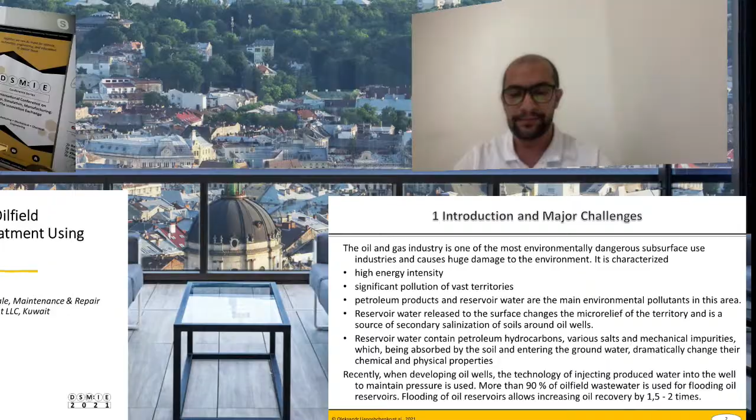Recently, when developing oil wells, the technology of injecting produced water into the well to maintain pressure is used. More than 90% of oil field wastewater is used for flooding oil reservoirs. Flooding of oil reservoirs allows increasing oil recovery by 1.5 to 2 times.

Next slide. The current scheme of pumping wastewater back into the reservoir at oil fields, with the addition of reagents to increase oil recovery, leads to a significant change in the chemical composition of reservoir waters, which affects the state of the subsurface and also creates a threat of spreading pollution to other aquifers.

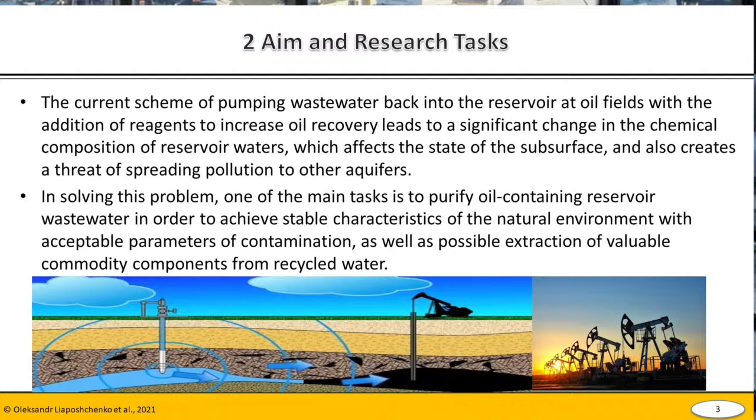In solving this problem, one of the main tasks is to purify oil-containing reservoir wastewater in order to achieve stable characteristics of the natural environment with acceptable parameters of contamination, as well as possible extraction of valuable components from recycled water. Next slide.

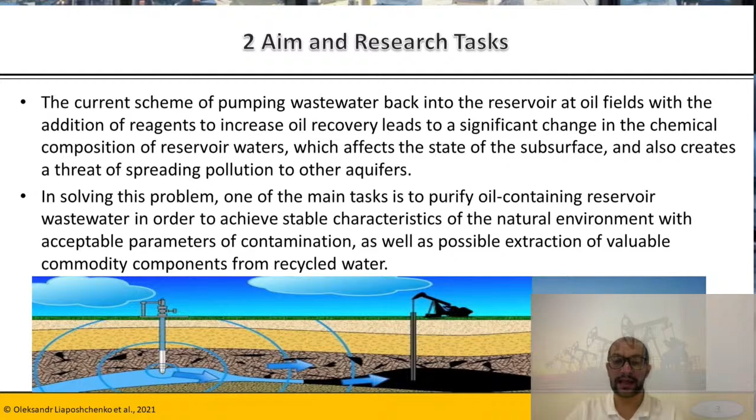Oil field wastewater purification is carried out by mechanical and hydromechanical processes: mixing, settling, centrifugation, and filtration, in order to destroy the armor shells on oil droplets, achieve coalescence of oil droplets, and remove the partially concentrated oil phase and sediment.

For the treatment of reservoir wastewater in the oil industry, the method of settling in settling tanks is used, but this method often does not provide the necessary degree of cleaning. Therefore, tanks with agitators, settling tanks, separators, centrifuges, hydrocyclones, drop forming units, flotators, and filters are also used as equipment.

In order to successfully purify oilfield wastewater and quickly reduce the aggregative and kinetic stability of oil droplets, oilfield wastewater purification units and devices are developed that increase the effect, depth, and speed of the purification process. Due to this, oil droplets rapidly enlarge through the coalescence process, and a polydisperse system turns into a monodisperse one.

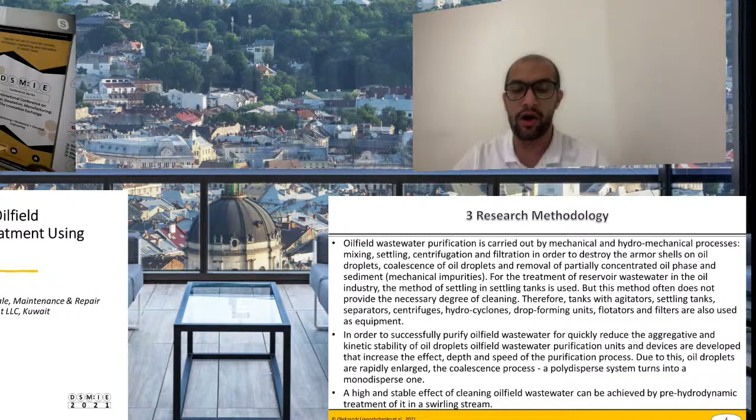A high and stable effect of cleaning oilfield wastewater can be achieved by pre-hydrodynamic treatment of it in a swirling stream. Next slide.

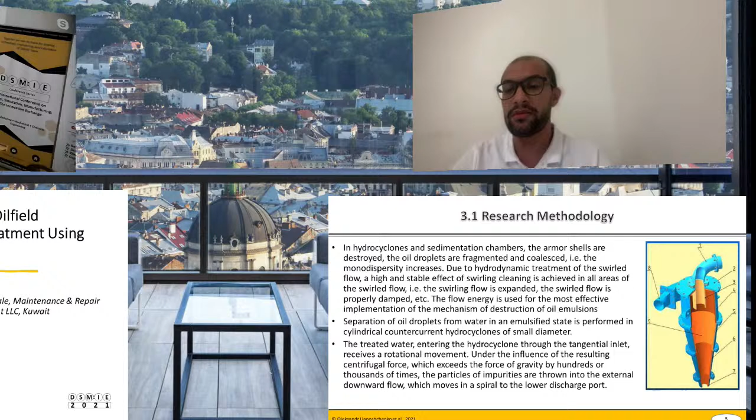In hydrocyclone and sedimentation chambers, the armor shells are destroyed, the oil droplets are fragmented and coalesced, and the monodispersity increases. Due to hydrodynamic treatment of the swirling flow, a high and stable cleaning effect is achieved in all areas of the swirled flow.

The swirling flow is expanded, the swirled flow is properly damped, and the flow energy is used for the most effective implementation of the mechanism of destruction of oil emulsion.

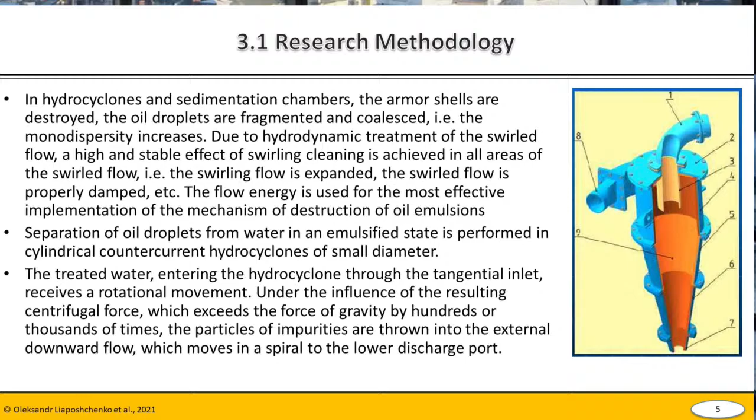The separation of oil droplets from water in an emulsified state is performed in cylindrical counter-current hydrocyclones of small diameter. The treated water entering the hydrocyclone through the tangential inlet receives a rotational movement under the influence of the resulting centrifugal force, which exceeds the force of gravity by hundreds or thousands of times. The particles of impurities are thrown into the external downward flow, which moves in a spiral to the lower discharge port.

The use of hydrocyclones as a stage of wastewater treatment can significantly increase the compactness of the entire treatment scheme and facilitate its operation. For water purification from oil and suspended substance, depending on the required degree of purification, the following devices are used: first, at the first stage of cleaning, hydrocyclones and settling tanks; second, in the second stage, hydrophilic and hydrophobic filters; third, for better water purification, coalescing filters.

The separation mechanism of three-phase systems in hydrocyclones is as follows: solid particles under the action of centrifugal force move to the wall of the hydrocyclone and along a helical trajectory move down to the lower outlet, through which they are removed from the hydrocyclone.

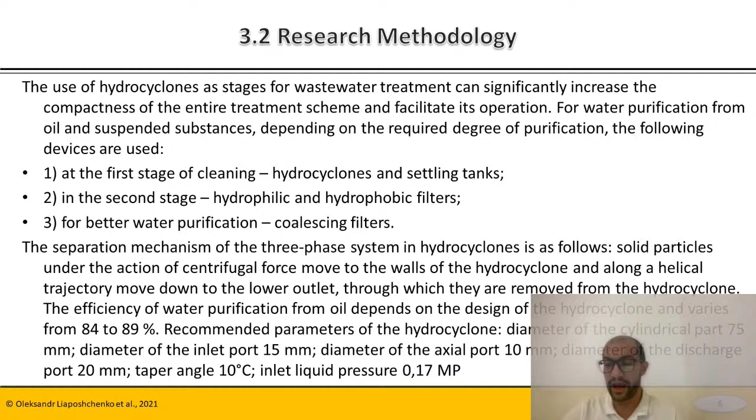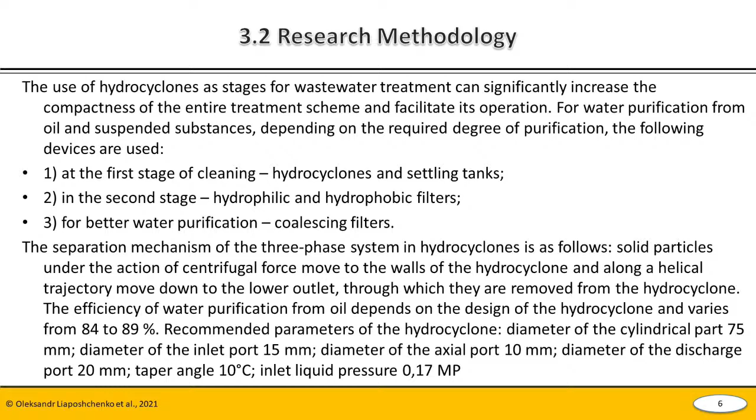The efficiency of water purification from oil depends on the design of the hydrocyclone and varies from 84 to 89%. Recommended parameters of the hydrocyclone: diameter of cylindrical part 75 mm, diameter of inlet port 15 mm, diameter of the axial port 10 mm, diameter of the discharge port 20 mm, taper angle 10 degrees, inlet liquid pressure 0.17 megapascal.

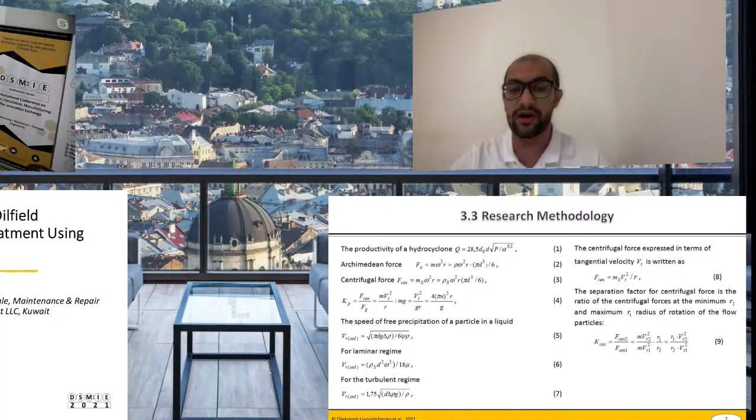The research methodology: this article shows some technology parameters and values for calculation of cyclone installation. As we can see, the multi-hydrocyclone can be used as the main element in the wastewater treatment system, provided the regime is observed in which there is no overexpression of the remaining oil in the water or water in oil.

The acceleration of movement does not exceed the value of 1,000 g. The device implements a mechanism for separating light oil and gas from the heavier fraction of water and oil.

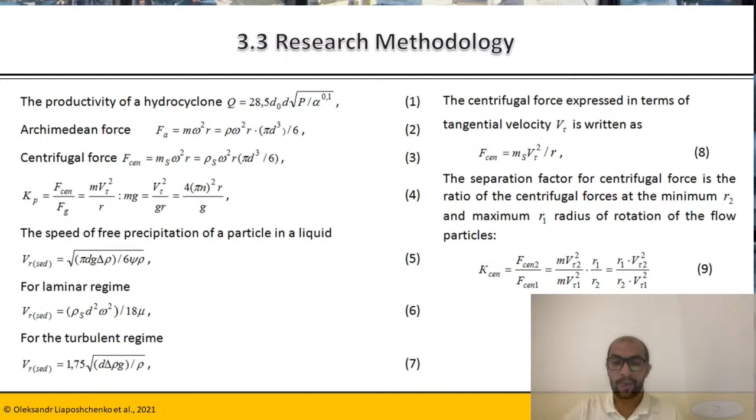Multi-hydrocyclones make it possible to achieve a deep degree of purification, and their use is promising both in the system of oilfield wastewater treatment and in the system of primary water discharge.

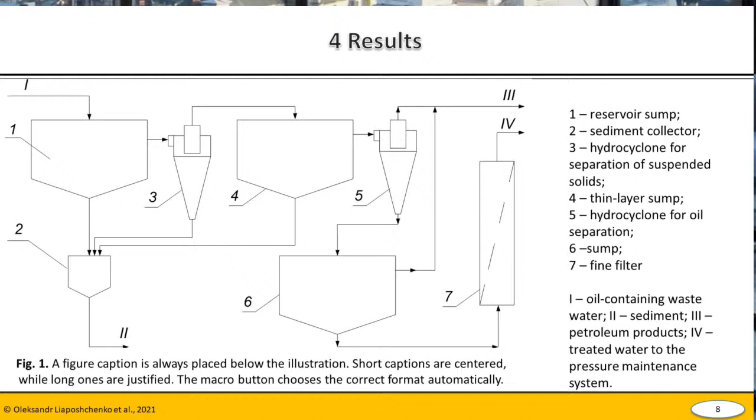It's advisable to treat oil-containing wastewater for reuse according to this scheme. The oil-containing wastewater flows into a receiving tank, sometimes into a pre-sump. Then the wastewater is sent for treatment by pumps, in particular the pressure hydrocyclone, in which large mechanical impurities are separated and dumped into a hopper. After passing through cylindrical conical hydrocyclones and thin layer settling tanks, wastewater enters cylindrical hydrocyclones for purification from petroleum products.

After hydrocyclones, the purified water is sent to flotator, coalescing, or sorption filters. If necessary, final purification of water in the sorption filter to a content of petroleum products of 0.05 milligram per liter is possible.

The treated water is returned to the well to maintain reservoir pressure. The cleaner the water being pumped into the formation, the greater the intake capacity of the injection well, and the lower the required amount of water and the lower the cost associated with the pressure maintenance system.

General requirements for pumped water are limited content of mechanical impurities and iron components, absence of hydrogen sulfide and carbon dioxide to prevent equipment corrosion, no organic impurities like bacteria or algae, and chemical compatibility with reservoir water.

The degree of oil wastewater purification is determined individually for each oil well. The permissible content of mechanical impurity is 3 milligram per cubic decimeter, and petroleum products 5 milligram per cubic decimeter. The presence of mechanical impurities is one of the main factors that cause a decrease in the permeability of the bottom hole formation zone when using both fresh and reservoir waters.

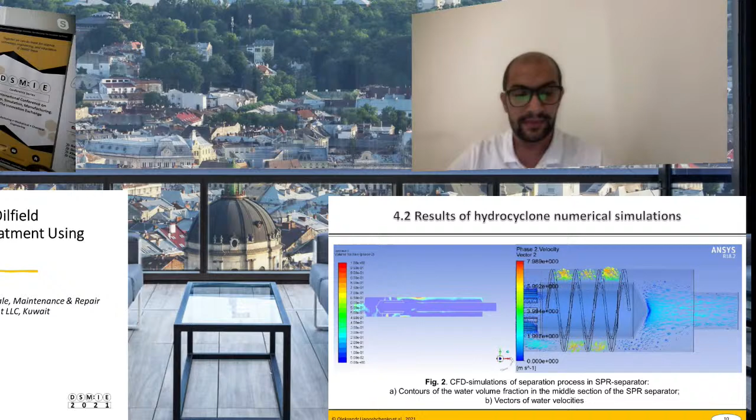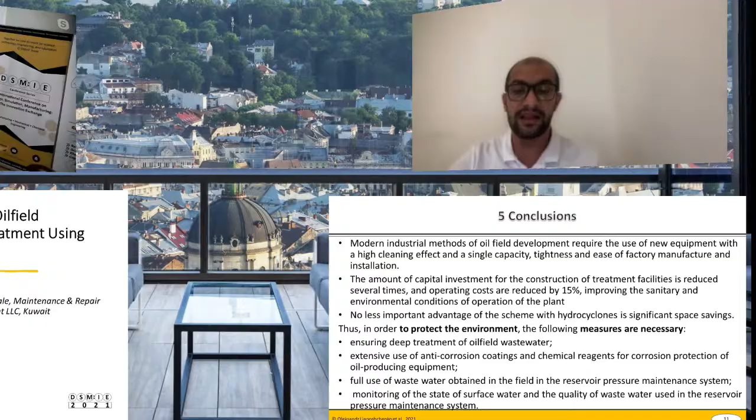Conclusion: modern industrial methods of oil field development require the use of new equipment with a high cleaning effect and a single capacity, tightness, and ease of factory manufacture and installation. The amount of capital investment for the construction of treatment facilities is reduced several times, and operation costs are reduced by 15%, improving the sanitary and environmental condition of operation of the plant. No less important advantage of the scheme with hydrocyclone is significant space savings.

Thus, in order to protect the environment, the following measures are necessary: first, ensuring deep treatment of oil field wastewater; extensive use of anti-corrosion coating and chemical reagents for corrosion protection of oil-producing equipment; and full use of wastewater obtained in the field in the reservoir pressure maintenance system.

Monitoring of the state of surface water and the quality of wastewater used in the reservoir pressure system. The developed methodology was released within the research project and implementation of energy efficiency modular separation device for oil and gas purification equipment. Thanks for your attention.

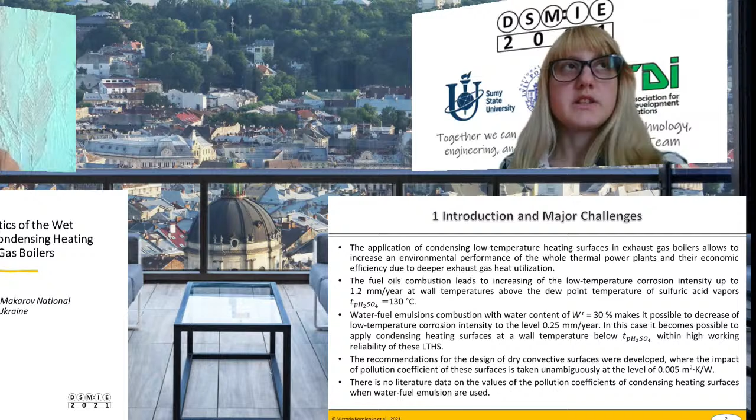The fuel oil combustion leads to an increase of the low temperature corrosion intensity up to 1.2 millimeter per year at wall temperature above the dew point temperature of sulfuric acid vapor, 130 degrees. Water fuel emulsion combustion with water content 30% makes it possible to reduce the low temperature corrosion intensity to the level of 0.25 millimeter per year.

In this case, it becomes possible to apply condensing heating surfaces in exhaust gas boiler with high working reliability on these surfaces. Recommendations for the design of dry convective surfaces were developed. But there is no literature data on the values of pollution coefficients of condensing heating surfaces when water fuel emulsion is used.

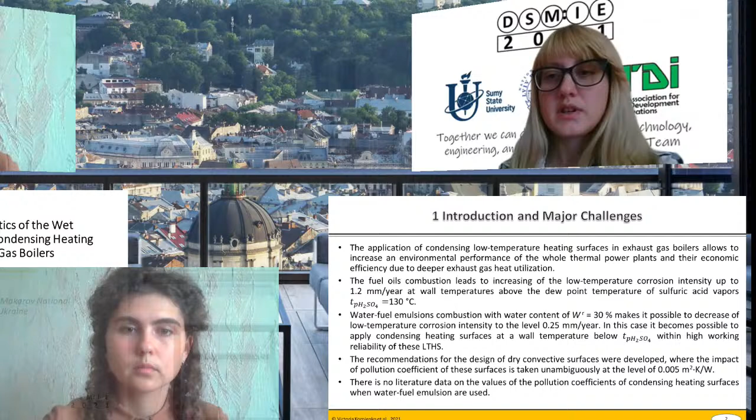Next slide, please. The aim of research is to obtain dependencies of heat transfer and thermal efficiency coefficients from the wall temperature for condensing low temperature heating surfaces.

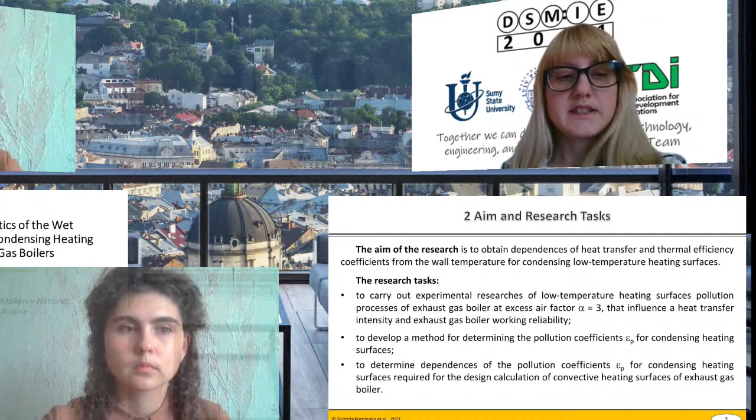The research task: first, to carry out the experimental researches of low temperature heating surfaces pollution process of exhaust gas boiler that influence heat transfer intensity and exhaust gas boiler working reliability. To develop a method for determining the pollution coefficients for condensing heating surfaces, and third, to determine dependencies of the pollution coefficients for condensing heating surfaces required for the design calculation of convective heating surfaces of exhaust gas boilers.

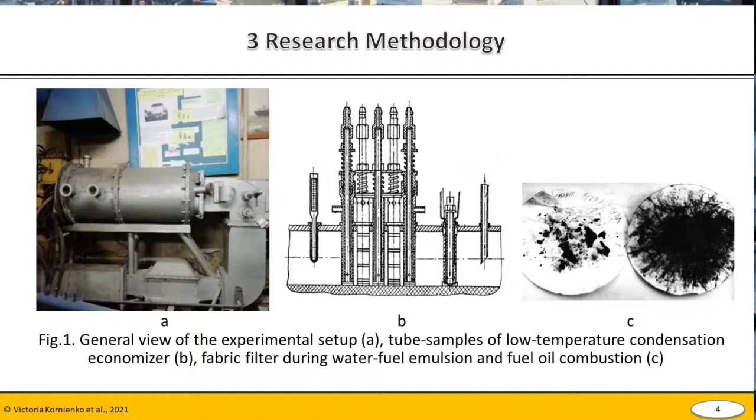Next slide, please. Experimental researches of pollution process intensity at wall temperature below the dew point temperature of sulfuric acid vapor were carried out in an experimental setup with combustion of fuel oil and water fuel emulsion based on them.

The experimental installation includes the following elements: combustion chamber, fuel preparation system, burner, and gas duct. A rotary nozzle is used as a burner.

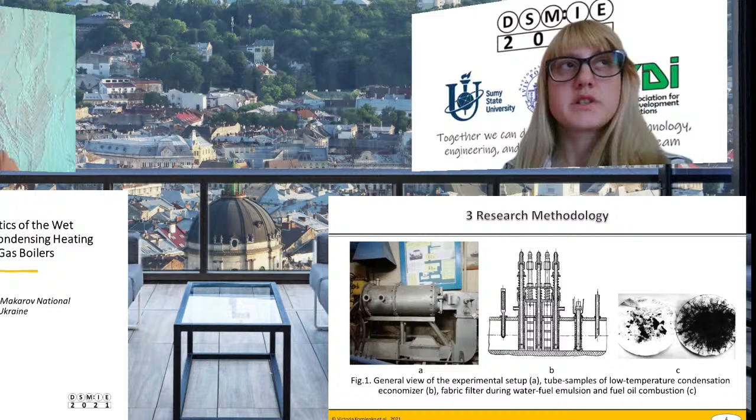Therefore, in order to estimate the pollution intensity when combusting various fuels with different combustion regimes, pollution process kinetics of short-term experiments was studied in order to obtain approximate equations that will enable predicting the development process at any time.

Next slide. The adequacy of obtained results was evaluated by comparing received values of pollution intensities with published operation data and the results of long-term experiments for 100 and 1,000 hours.

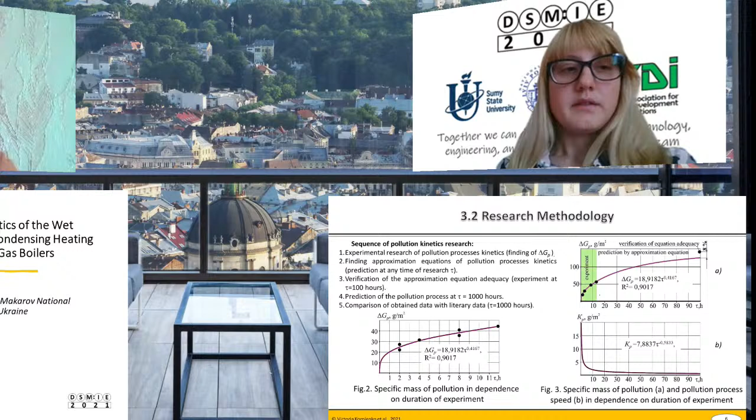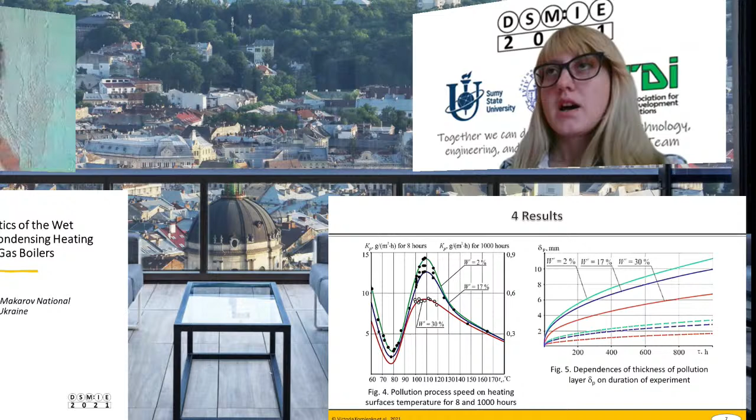Next slide. The thickness of pollution layer and its thermal conductivity depend on the porosity value. According to the adopted methodology, it's assumed that the layer porosity is 0.3 when fuel oil is used, and the average porosity value is 0.48 when water fuel emulsion is used.

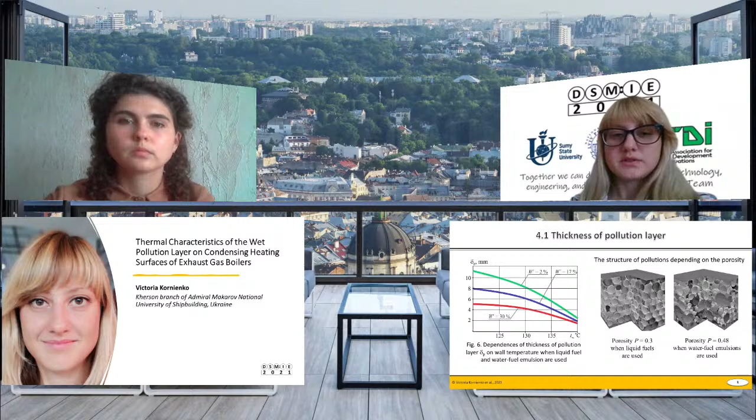Next slide, please. It was decided to use the Maxwell formula number 1 to determine the value of thermal conductivity, which takes into account the porosity of the liquid filled deposits.

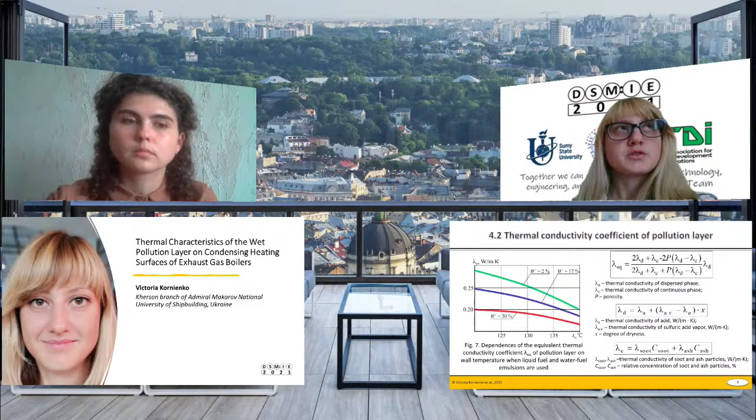When determining thermal conductivity for the zone of the layer with a vapor-acid mixture, it's necessary to take into account the degree of dryness of this mixture in the layer, as well as the dependence of sulfuric acid concentration on the wall temperature.

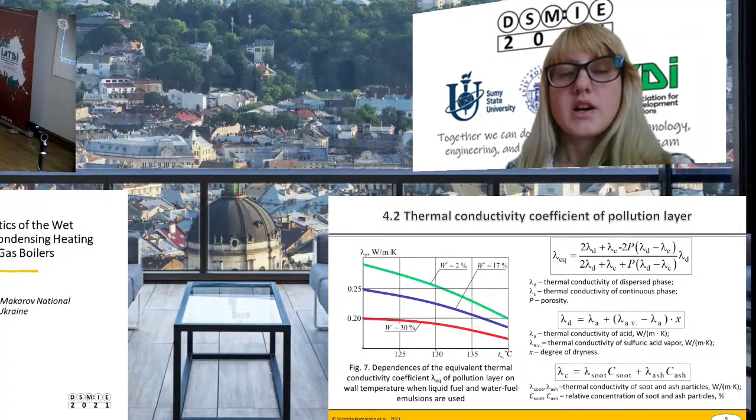At wall temperature, 140 degrees, the degree of dryness was taken to be 1. At temperature 110 degrees it was equal to 0, and at temperature 130 degrees it was 0.9. The value of thermal conductivity for this temperature range was determined by formula number 2.

The thermal conductivity of solid particles depends on the thermal conductivity of soot and ash particles and their concentration, formula number 3. Next slide, please.

For condensing heating surfaces, the pollution coefficients during combustion of water fuel emulsion are lower by 2 times in comparison with combustion of fuel oil. The dependencies of the pollution coefficient make it possible to determine the values of the heat transfer and thermal efficiency coefficient.

Next slide, please. Therefore, the thermal efficiency coefficient during the combustion of water fuel emulsion is higher, which at the same thermal power will reduce the heating surface.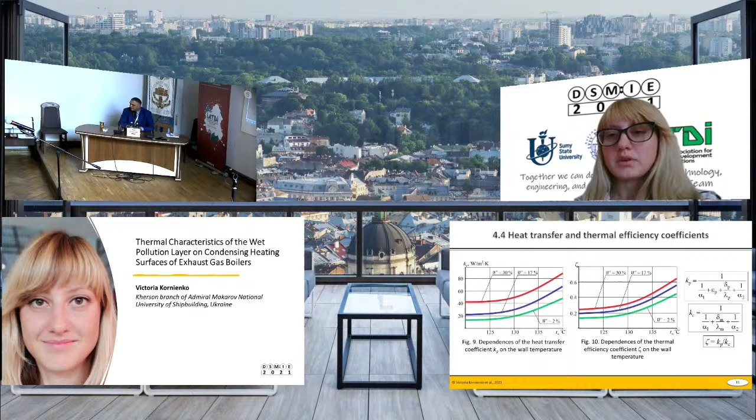And conclusions. For condensing heating surfaces, the pollution coefficient during combustion of water fuel emulsion is lower by 2.2 times.

Heat transfer and thermal efficiency coefficients are 3.5 times higher in comparison with combustion of fuel oil.

The obtained dependencies of the pollution coefficients for condensing heating surfaces are recommended for use in standard methods for the design calculation of convective heating surfaces of exhaust gas boilers.

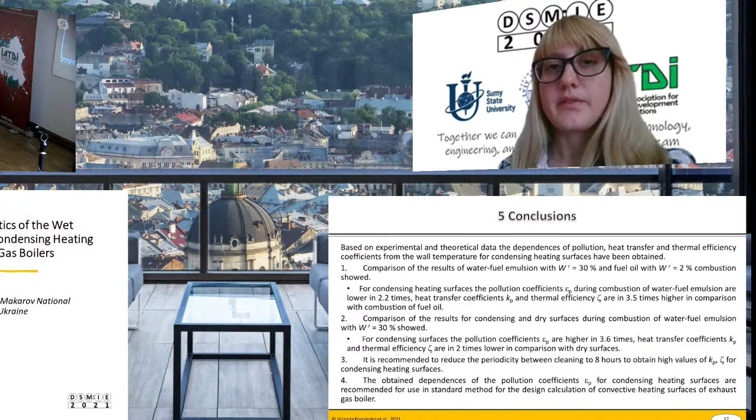Thank you for your attention.

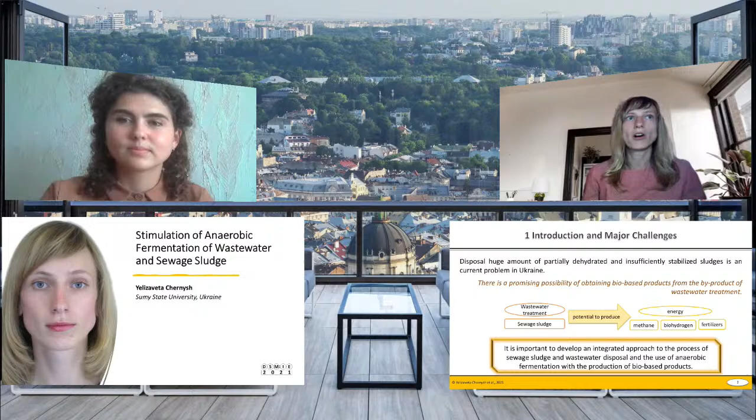It's my pleasure to present to your attention the topic stimulation of anaerobic fermentation of wastewaters and sludge. Next slide, please.

You see that now it's really a challenge nowadays in the world, because basic treatment and wastewater systems and sludge recycling need to provide a new innovative approach, a complex approach that can be very useful for life safety protection in general. And under this, we talk about

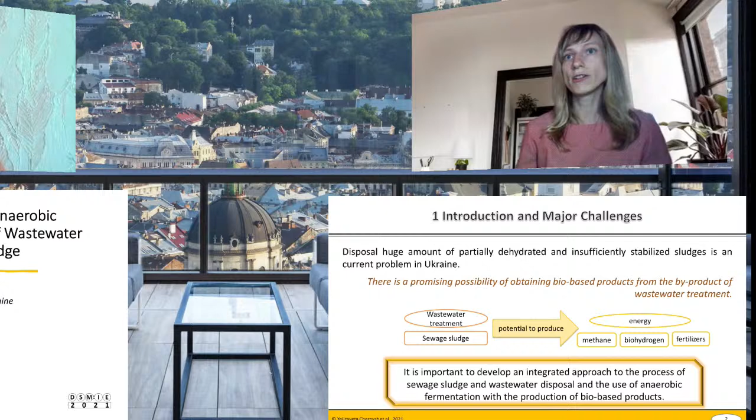using wastewater and sewage sludge for biobased product production, and getting energy and fertilizer. Please, next slide - aim and research task.

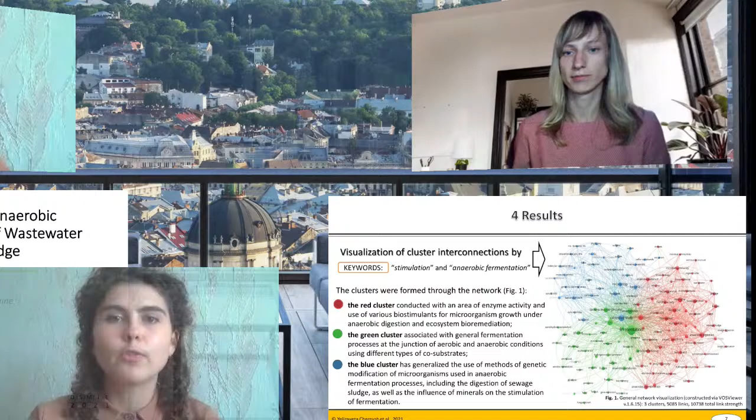The red cluster connects with the area of enzyme activity and the use of biostimulants for microorganism growth under anaerobic digestion and ecosystem bioremediation. The green cluster is associated with general fermentation processes and the junction of anaerobic and aerobic conditions using different types of co-substrates. The blue cluster generalizes the use of microorganism genetic modification methods used in anaerobic fermentation processes.

While analyzing the visualization clusters on stimulation of anaerobic digestion processes, we also noted studies on biostimulation of bacterial activity using magnetic and electromagnetic fields. There is a large amount of contradictory data.

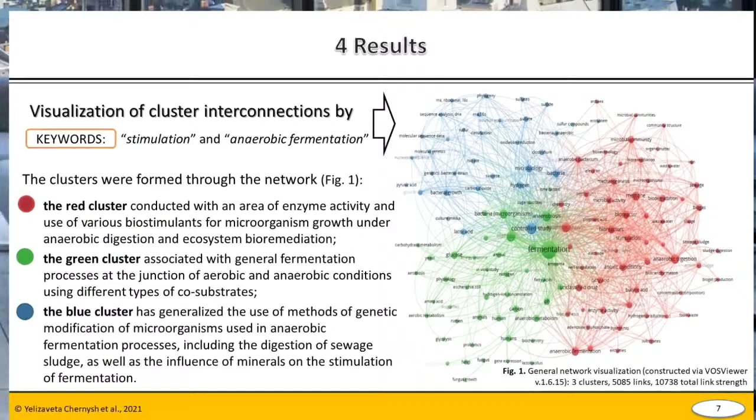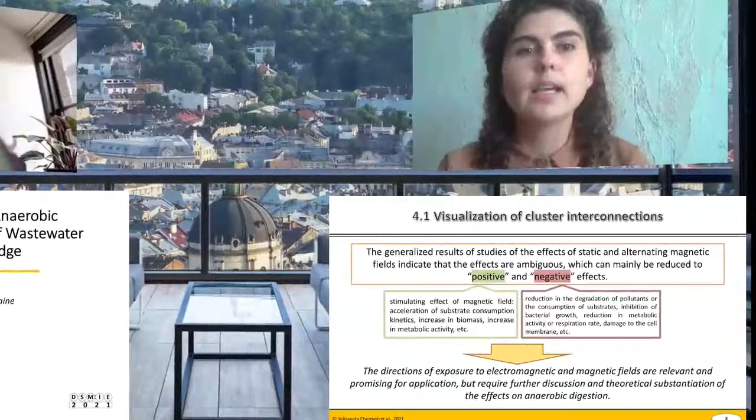Next slide please. The generalized study results of static and alternating magnetic field effects indicate that the effects are controversial, mainly reducing to positive and negative effects.

Also, data from some studies testify that there is a stimulating effect of magnetic fields, such as an increase in biomass and metabolic activity, but most experiments confirm that there is also a negative effect on microorganisms, such as a reduction in substrate consumption and inhibition of bacteria growth.

The contradiction in the influence on bioprocesses is due to the lack of a unified approach to the regime and design parameters of processing microorganisms with magnetic fields. Thus, exposure to electromagnetic and magnetic fields is promising for application, but requires further discussion of the effect on anaerobic digestion. Next slide please. The biological effect of an external magnetic field must be associated with the effect of the external field on water in a metastable state that differs from equilibrium.

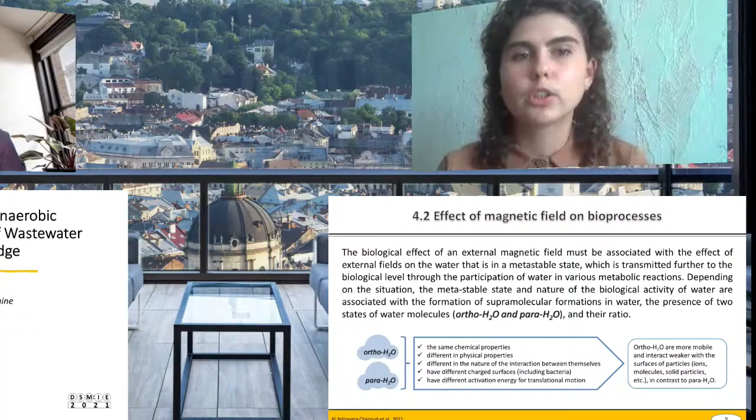This metastable state is transmitted further to the biological level through water's participation in various metabolic reaction processes. The metastable state and nature of the biological activity of water are associated with the formation of supramolecular structures in water, the presence of ortho-H2O and para-H2O states of water molecules, and their ratio.

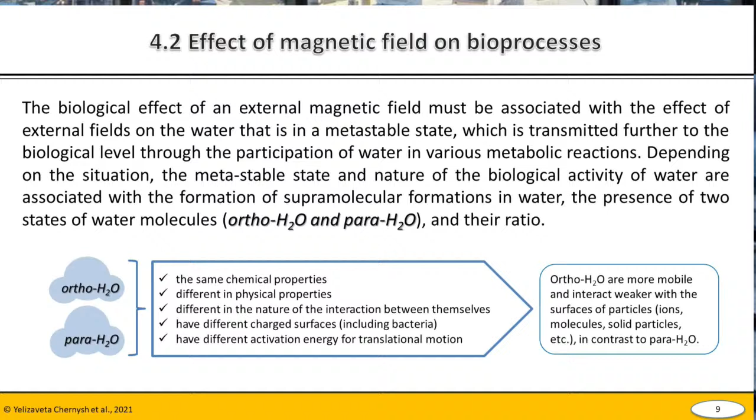Ortho-H2O molecules are more mobile and interact weaker with the surface of particles, in contrast to the para-H2O state of water. Next slide please.

After short-term exposure of the magnetic field on the aqueous solution, the mechanism of effect occurrence during treatment with the external magnetic field on biosuspension can be applied to describe the processes. Thus, special attention should be paid to the mechanism of manifestation and unification of the positive effect of magnetic fields on biosuspension.

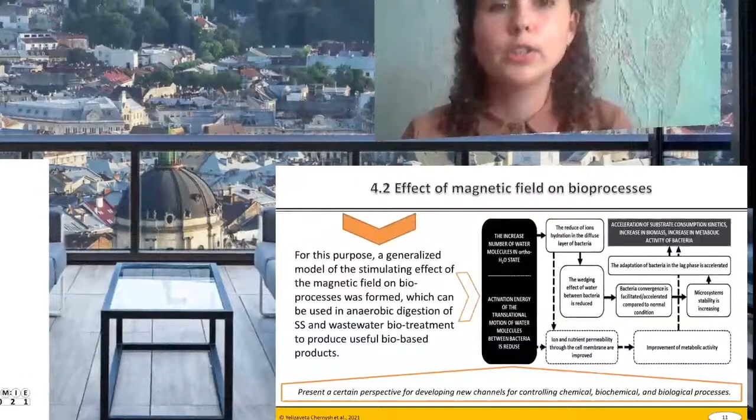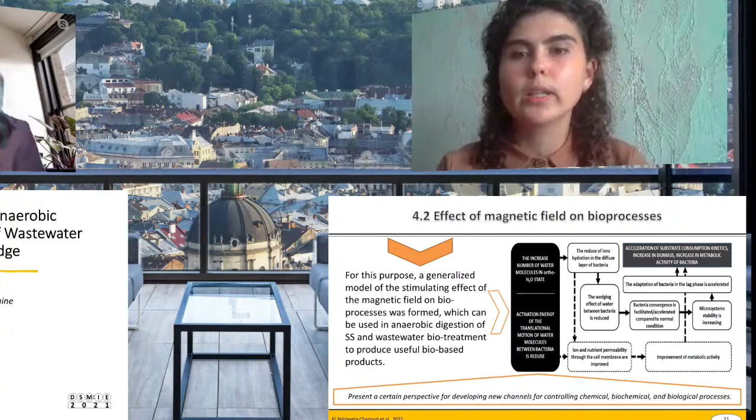Next slide please. According to this concept, a generalized model of magnetic field stimulation effect on bioprocesses was formed and presented on the slide. An increase in the amount of ortho-H2O in the water layers surrounding the bacteria will improve metabolism by accelerating the exchange and rearrangement of water molecules in hydrate shells of ions and molecules involved in cell metabolism. The model can be used in anaerobic digestion of sewage sludge and wastewater biotreatment to produce useful bio-based products.

Next slide please. In conclusion, let's sum up the main points. The development of effective stimulating methods for municipal sewage sludge anaerobic fermentation is important in the context of an integrated approach to sewage sludge and wastewater disposal.

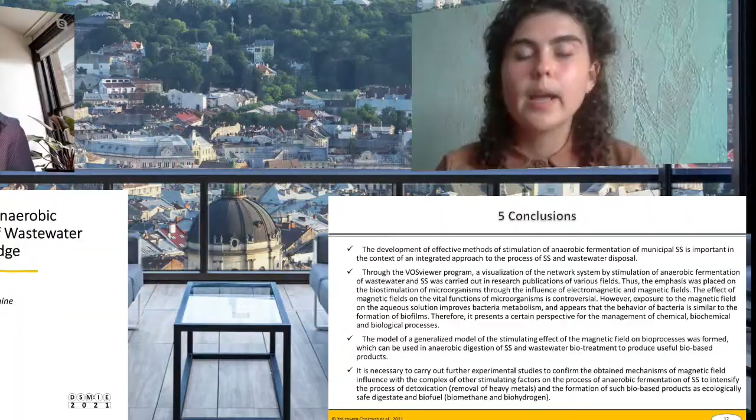Through the VOSviewer program, the network system was visualized, emphasizing the biostimulation of microorganisms through the influence of electromagnetic and magnetic fields. The effect of magnetic fields on the vital function of microorganisms is controversial. However, exposure of the aqueous solution to the magnetic field improves bacteria metabolism, and the behavior of bacteria appears similar to the formation of biofilms.

Finally, it is necessary to carry out further experimental studies to confirm the mechanism of magnetic field influence, combined with other stimulating factors, on sewage sludge anaerobic fermentation processes, to intensify heavy metals removal and the formation of ecologically safe bio-based products such as digestate and biofuel.

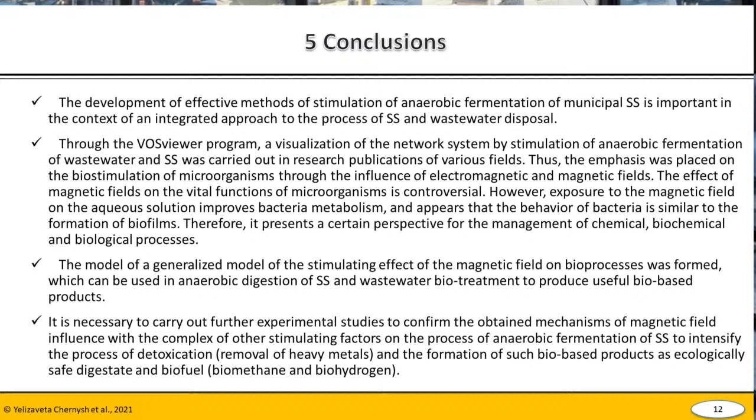Thank you. For the acknowledgement, I want to note that we are really thankful to our Japanese colleagues. When I was in Japan, it was a very interesting experience to be at Hokkaido University working with Dr. Manabu Fukuye. We are thankful to the Japan Society for the Promotion of Science for supporting this scientific cooperation, which allowed us to study the basic processes and impact levels across different technological implementations. Together with our Japanese colleagues and colleagues from different countries in Europe, we continue our work at the International Applied Innovation Center Aquatic Arteria, and hope to find new opportunities to work on this and other topics for reducing technogenic impact on water resources, providing new ecologically and environmentally friendly technologies for wastewater and sludge treatment.

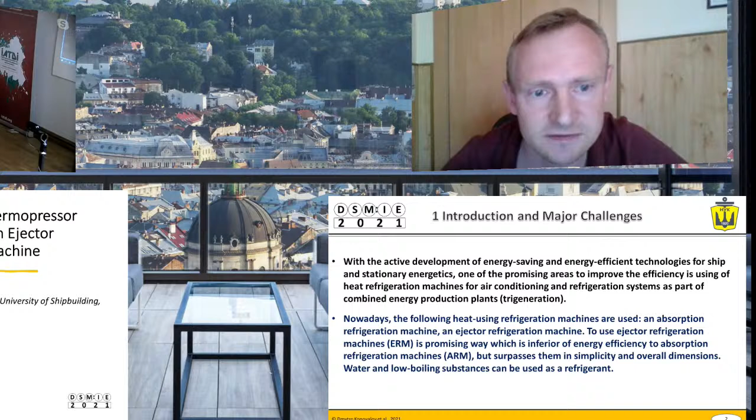Next slide, please. To search for reserves for increasing the utilization and heat efficiency of power plants using heat-consuming circuits, based on both heat-using refrigeration machines and the method of cooling cyclic charge air or inlet air, one can turn to the effect of thermodynamic compression. It should be noted that the effect of thermodynamic compression in the heat-using ejector refrigeration machine depends largely on the thermodynamic and thermophysical properties of the refrigerant. Therefore, it's advisable to determine a refrigerant which would provide the greatest pressure increase with the same vapor cooling efficiency, for example before the condenser or after the evaporator.

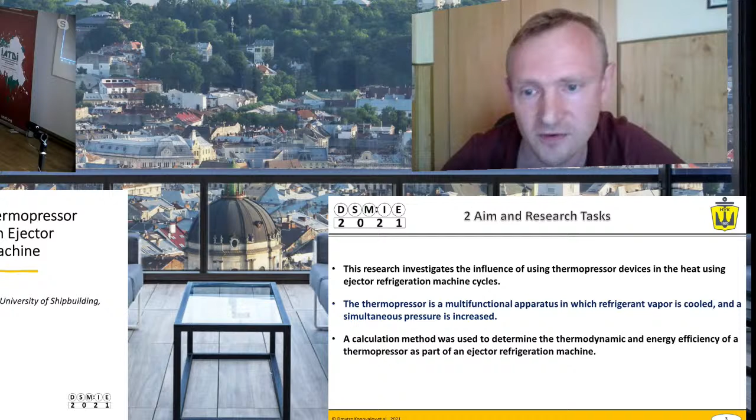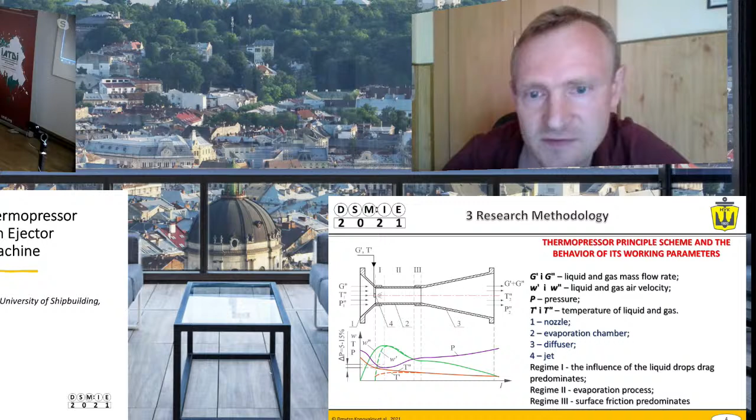Next slide, please. The thermopressor is a two-phase jet apparatus in which the gas pressure and gas cooling are increased by removing heat from the gas flow. With proper organization of the process of evaporative contact cooling, the effect of thermodynamic compression takes place — a phenomenon in which gas pressure is increased during the instantaneous evaporation of liquid injected into the gas flow, accelerated to a speed close to sound.

Next slide, please. The thermopressor has some advantages which make it quite competitive compared with traditional heat exchangers and other devices: the absence of moving parts, complete tightness and high reliability, simplicity of manufacture and maintenance, and the ability to work without energy from the outside.

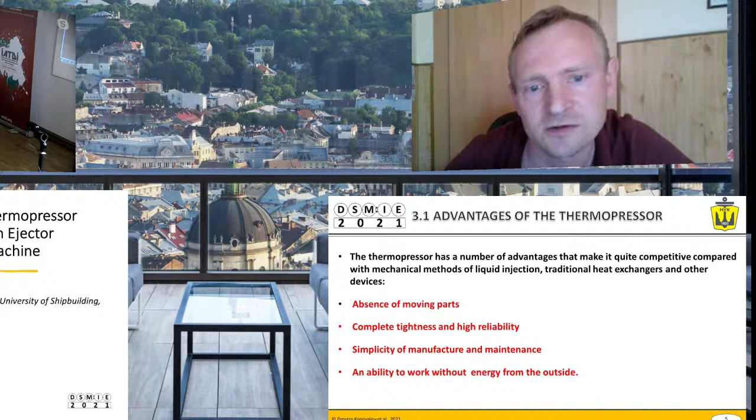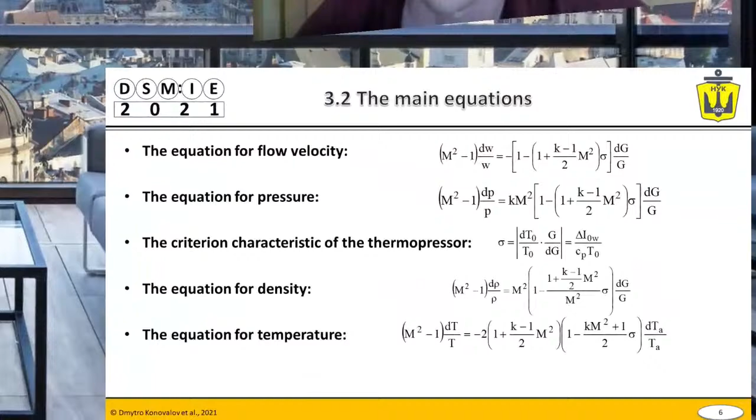Next slide, please. A comparative calculation method was used to determine the thermodynamic and energy efficiency of a thermopressor as part of a refrigeration machine. The calculation took into account the pressure loss in the nozzle, the working chamber, the diffuser, and the frontal resistance of the injected liquid droplets. A mathematical model was developed based on the equations of movement velocity, pressure, density, and temperature of the flow under the combined effect of two factors: consumption and heat.

Next slide, please. One of the variants to reduce the vapor pressure at the exit of the ejector diffuser at a constant condensation temperature is to use a thermopressor in front of the condenser.

Reducing vapor overheating in the thermopressor also reduces the thermal load on the condenser. Increasing the total pressure in front of the condenser will reduce the degree of pressure increase in the ejector and, as a result, increase the ejection coefficient and the thermal coefficient.

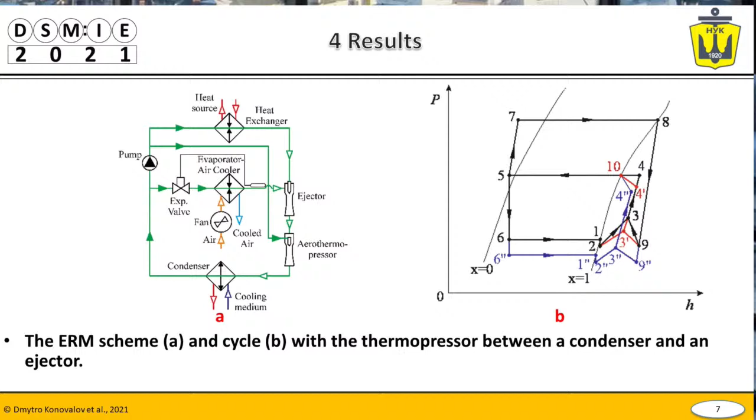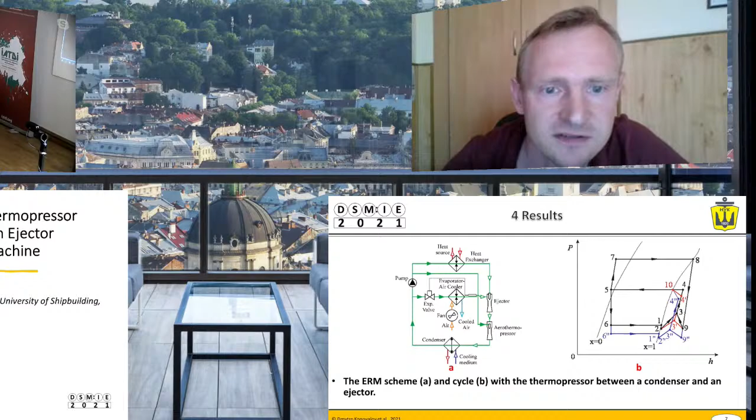The flow of liquid refrigerant is carried out after it takes off from the circulation pump. This solution allows providing a higher pressure for the injection by the nozzle of the thermopressor and accordingly reduces the average diameter of the liquid droplets at the inlet to the working chamber. This makes it possible to increase the total increase in pressure in the thermopressor by reducing the relative length of evaporation and reduce the effects of drag on the gas vapor flow.

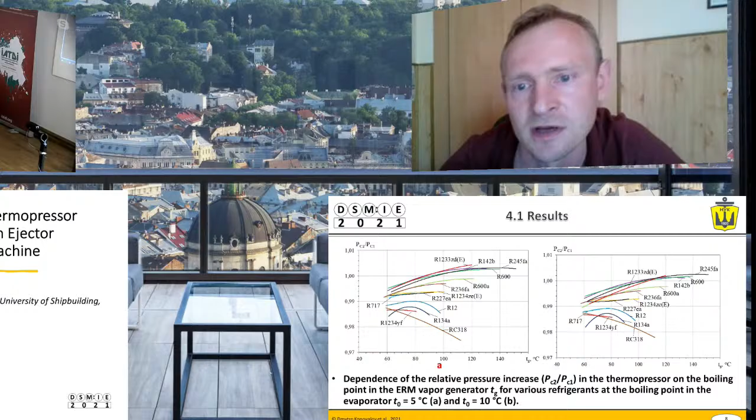Analysis of thermopressor efficiency shows that a positive increase in the gas flow pressure will be observed only for some refrigerants, R142B and R245FA, and all other refrigerants are characterized by a decrease in total pressure due to the prevailing influence of resistance and low temperature differences in the thermopressor.

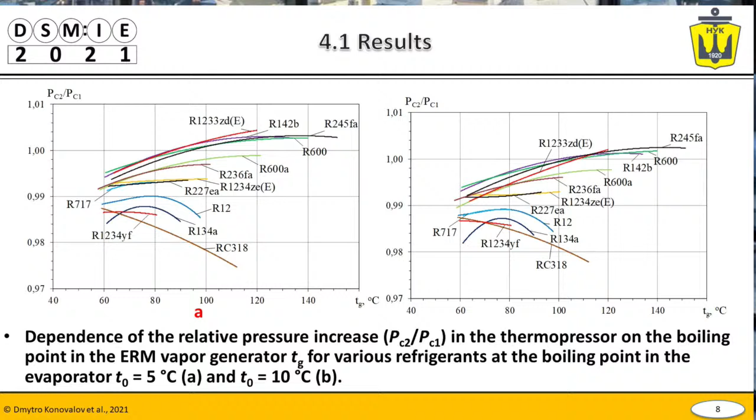A small amount of liquid should be noted, which should be injected for complete evaporation in the thermopressor. So for refrigerant R600 and R245FA, by 10 to 16%, the required amount of liquid for R142B is less, averaging 5 to 10%.

Increasing the pressure in the thermopressor allows reducing the compression ratio in the ejector and accordingly increase the ejection coefficient. This in turn will allow providing the thermal coefficient.

It can be seen that the greatest efficiency by using the thermopressor at the maximum possible boiling point of the generator emerges for the next refrigerants: R1233zd(E) and R245FA.

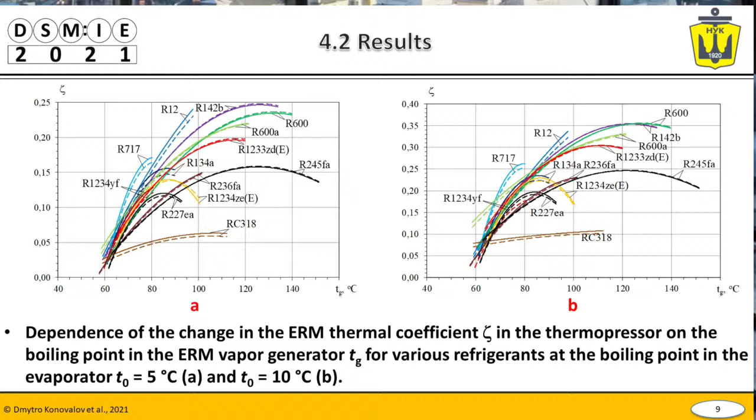From the above analysis of the ejector refrigeration machine effectiveness, we can conclude that it's necessary to use the thermopressor in other possible schemes. In such scenarios, refrigerant vapor cooling should be greater than 30-40 degrees, for example, in a cascade scheme or a two-stage scheme. The ejector refrigeration machine can be used as an upper stage in a cascade.

The thermopressor applying is also possible in schemes with intensified heat transfer in the evaporator, for example, when using the circulation of a liquid refrigerant using a jet pump injector. The increase in the coefficient of performance by 1.5 to 2% is expected due to increased pressure in the thermopressor by 1 to 2%.

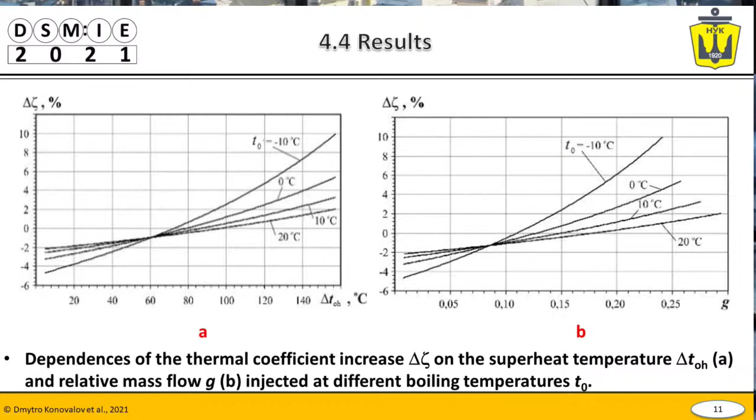Another promising solution is to use the thermopressor in a circuit with heat recovery in a regenerative heat exchanger. In this case, it's advisable to install the thermopressor behind the evaporator at the ejector inlet. Such a solution reduces superheating of vapor at the suction of the ejector and provides an increase in thermal coefficient by 2 to 5%.

As a result of the installation operation analysis at boiling temperature in the evaporator from -10 to +20 degrees, it's clear that with superheating of steam after the regenerative heat exchanger of 140 degrees, the thermal coefficient is increased by 4 to 8%, while the total increase in the heat coefficient is 10 to 15%.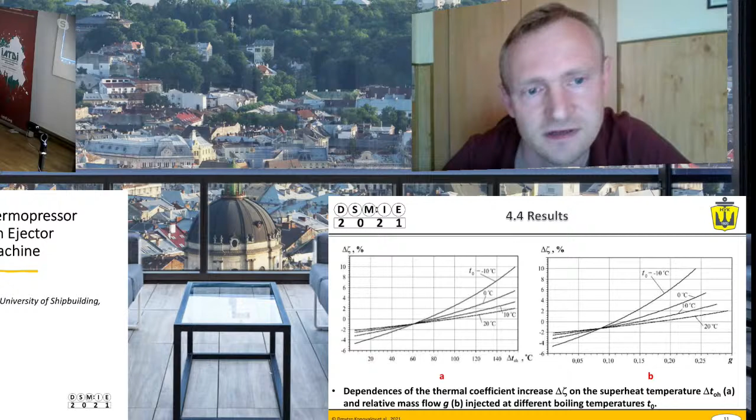Thank you for your presentation, it's really interesting. Does anybody have a question? I think there are no questions. Thank you very much, thank you very much.

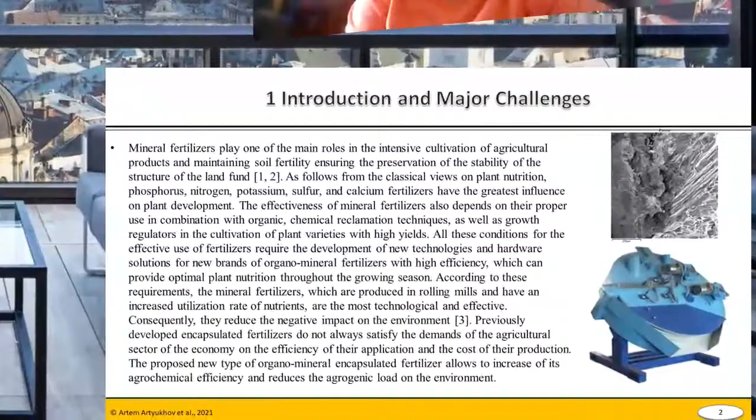As follows from the classical views on plant nutrition, phosphorus, nitrogen, potassium, sulfur, and calcium fertilizers have the greatest influence on plant development. The effectiveness of mineral fertilizers also depends on their proper use in combination with organic, chemical techniques, as well as growth regulators in the cultivation of plant varieties with high yields.

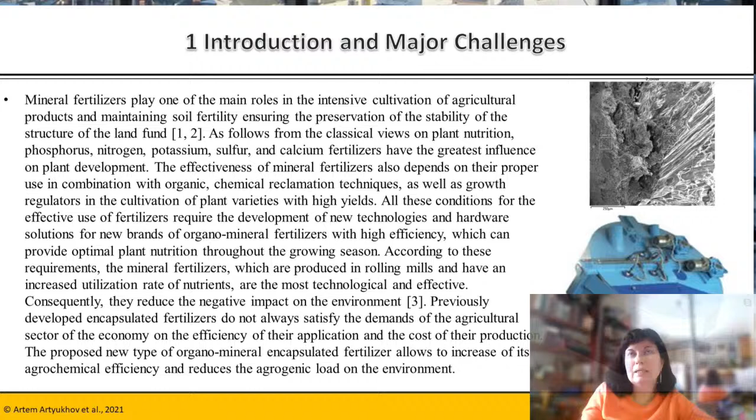To produce fertilizers with high efficiency, which can provide optimal plant nutrition throughout the growing season, new fertilizers should be created. They should contain two parts and a lot of mineral elements, and they should dissolve partially, so in time a long release of this fertilizer should be achieved.

Consequently, such fertilizers can reduce the negative impact on the environment due to the slow dissolution, and previously developed encapsulated fertilizers don't always satisfy the demands of the agricultural sector of the economy on the efficiency of their application and the cost of production.

So we proposed a new type of organomineral fertilizers, encapsulated, which allows us to increase agrochemical efficiency and reduce the agrogenic load on the environment.

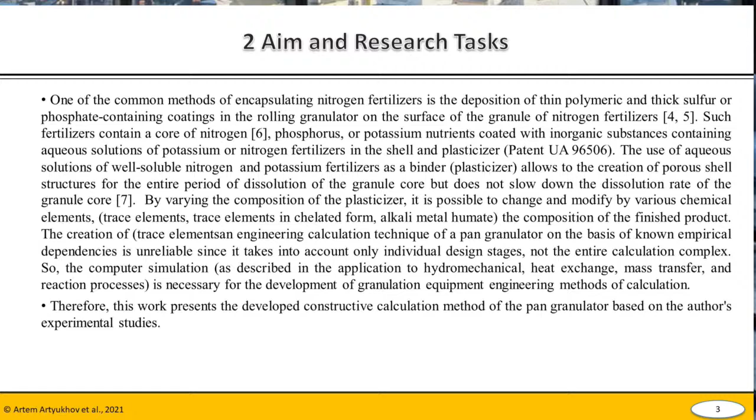One of the common methods of encapsulating nitrogen fertilizers is the deposition of thin polymeric, or thick sulfur or phosphate-containing coatings at the rolling granulator on the surface of granular nitrogen fertilizers.

Such fertilizers contain a core of nitrogen, phosphorus, potassium nutrients coated with inorganic substances containing an aqueous solution of potassium and nitrogen-containing fertilizers in the shell of plasticizer.

The use of an aqueous solution of well-soluble nitrogen like carbamide, which we used for granule production, and potassium fertilizers as a binder, allows creation of porous shell structures for the entire period of dissolution of the granular core, but doesn't slow down the dissolution rate of the elements.

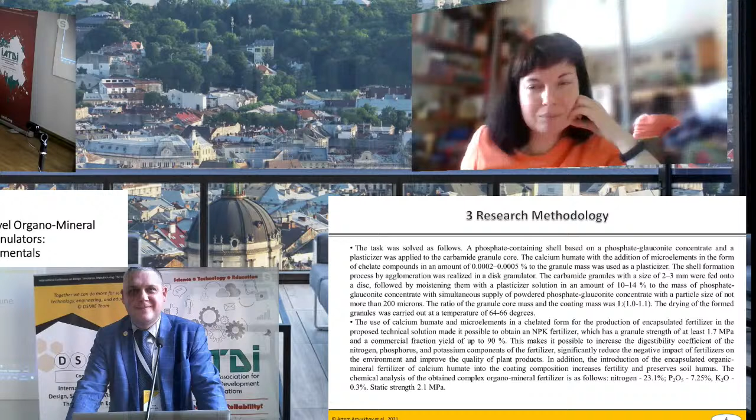Creation of some techniques should include elemental engineering calculation technique of the pan-granulator and computer simulation, which should include application to hydromechanical heat exchange, mass transfer, and reaction processes which are necessary for the development and granulation equipment, engineering methods of calculation.

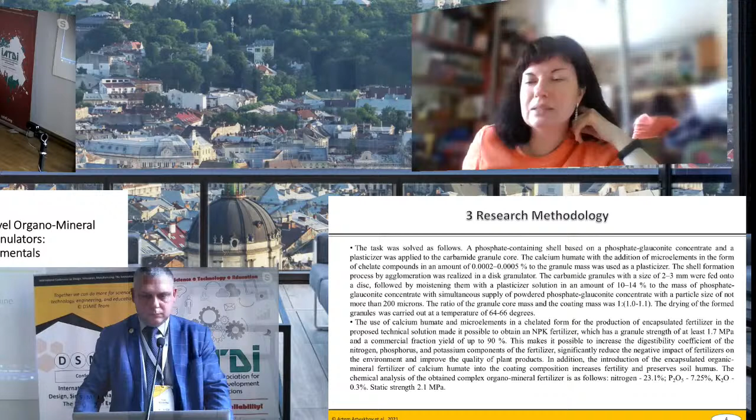Therefore, this work presents the developed constructive calculation method of the pan-granulator based on the authors' experimental studies.

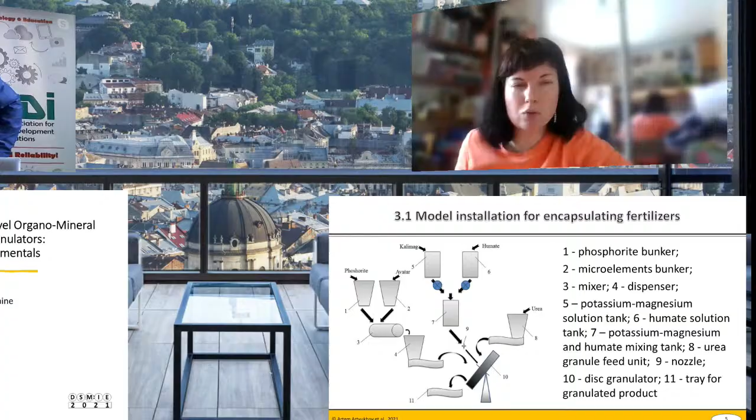The shell formation process by agglomeration was realized in a disc granulator, as you can see in this picture scheme of the granulator. The carbamide granules with a size of 2-3 millimeters were fed onto a disc, followed by moisturizing them with plasticizer solution in an amount of 10–14% of the mass of phosphate-glauconite concentrate, with simultaneous supply of powdered phosphate-glauconite concentrate with a particle size of not more than 200 microns.

The ratio of granular core mass to coating mass was 1 to 1.1, and drying of the formed granules was carried out at temperatures of 64–66 degrees. The use of calcium humate and microelements in chelated form for production of encapsulated fertilizer in the proposed technical solution made it possible to obtain...

fertilizers that contain nitrogen, phosphorus, and potassium, which have a granular strength of at least 1.7 megapascals, and a commercial fraction yield of up to 90%. This makes it possible to increase the digestibility coefficient of nitrogen, phosphorus, and potassium components in fertilizers, significantly reduce the negative impact of fertilizers on the environment, and improve the quality of plant products.

The chemical analysis of the obtained complex organomineral fertilizers was as follows: nitrogen nearly 23%, phosphorus oxide nearly 7%, and potassium oxide 0.3%. Static strength was 2.1 megapascals.

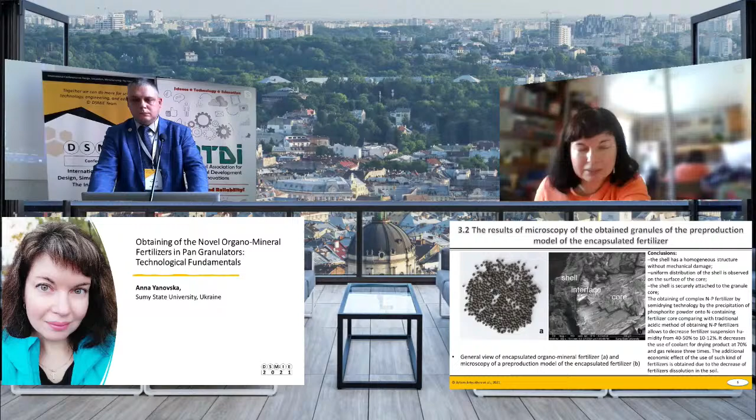So how does it look like? Next slide, please, number 6. So this is a general view of our carbamide granules, and a scanning electron microscopy image of the shell, interface, and core of such a granule.

The shell has a homogeneous structure, as you can see, without mechanical damage, and uniform distribution of the shell is observed on the surface of the core.

The shell is securely attached to the granular core, and obtaining a complex nitrogen phosphorus fertilizer by semi-drying technology through precipitation of phosphorite powder onto the nitrogen-containing fertilizer core, compared with traditional acidic methods of obtaining nitrogen phosphorus fertilizers, allows us to...

decrease fertilizer suspension humidity from 40–50% down to 10–12%. This decreases the use of coolant for drying the product by 70% and gas release by 3 times.

An additional economic effect of using this kind of fertilizer is obtained due to the decrease of fertilizer dissolution in the soil. Next slide, please.

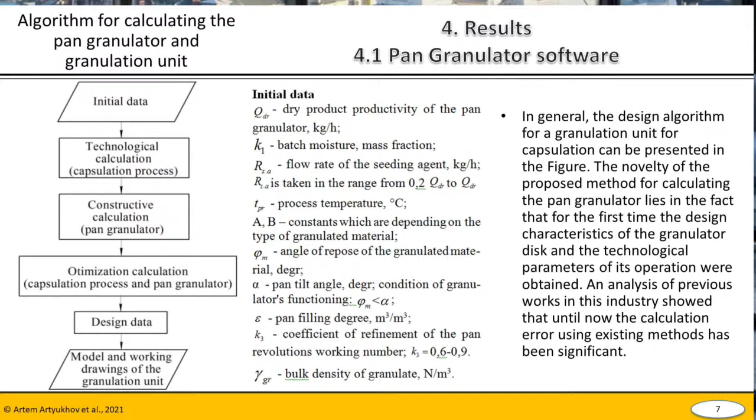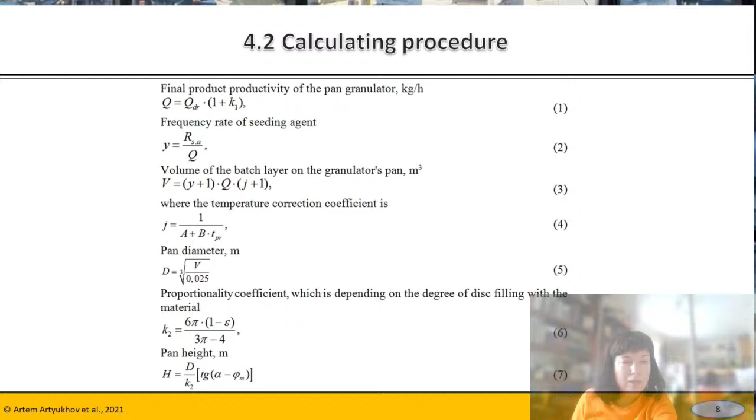Next slide, please. Here you can see the calculating procedure, how the program was calculated, and some technical moments of this granulating technology. I'm not very strong in this part of our investigation, I'm sorry. Next slide, following the calculation, you can see. And next slide.

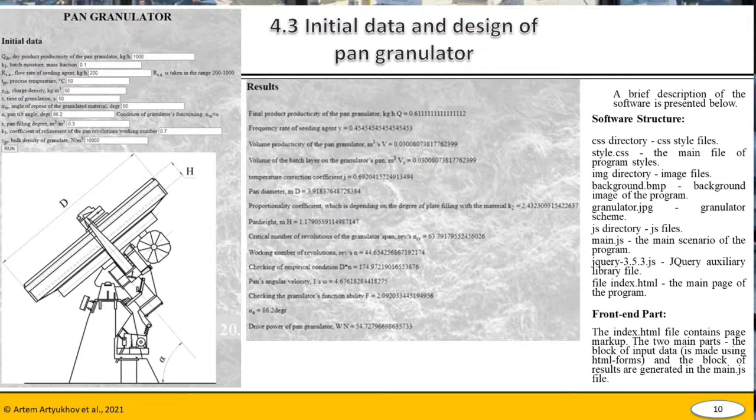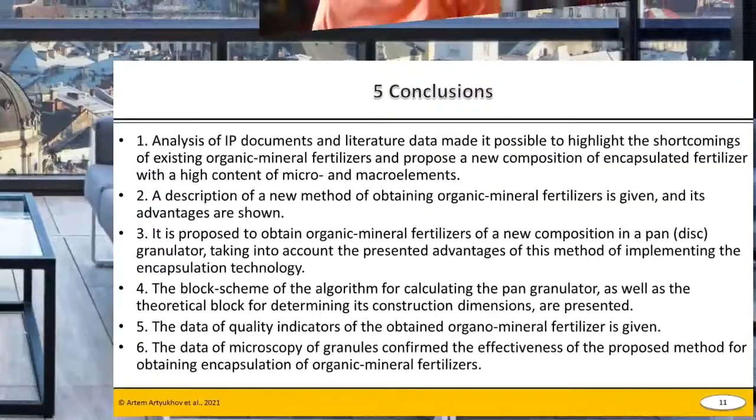So this program produced pan-granulator design and some technical characteristics. Next, we came to the conclusion that analysis of IP documents and literature data made possible to highlight the shortcomings of existing organomineral fertilizers and propose a new composition of encapsulated fertilizers.

with a high content of micro- and macroelements. A description of the new method of organic mineral fertilizers obtaining was given, and advantages were also shown. It is proposed to obtain organic mineral fertilizers of new composition in a pan-granulator, taking into account the presented advantages of this method. A block scheme of the algorithm for calculation of the pan-granulator was presented. Data of quality indicators of obtained mineral fertilizers is given.

This work is prepared as part of a research project process of formation of novel ecologically safe fertilizers with prolonged action based on phosphorite deposit raw materials, which is financed by the state budget of Ukraine. Thank you very much for your attention. Your questions, please.